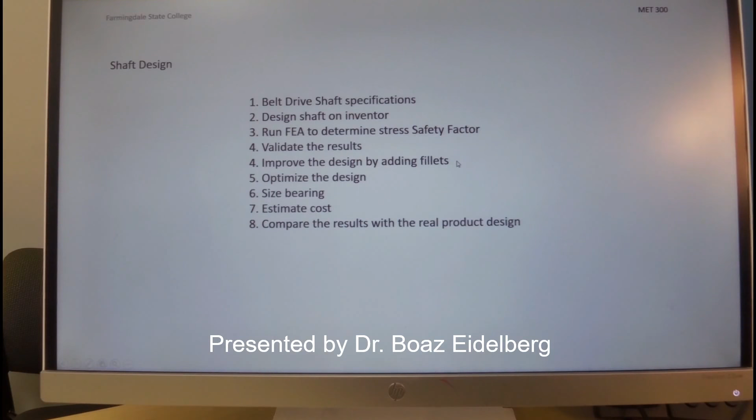Today's presentation will be design and analysis of an actuator shaft. We'll look at the specification of the shaft, we'll design it in Inventor, we'll run finite element analysis with Inventor, we'll validate the result, we'll improve the result by adding fillets and changing the diameters. We'll size the bearings, estimate the cost, and compare the results with actual design.

Linear stages are used extensively in automation. In particular, they are assembled in XYZ configuration, which is called Cartesian robot. They're also used for packaging, assembly, machining, testing, pick and place, and many other applications.

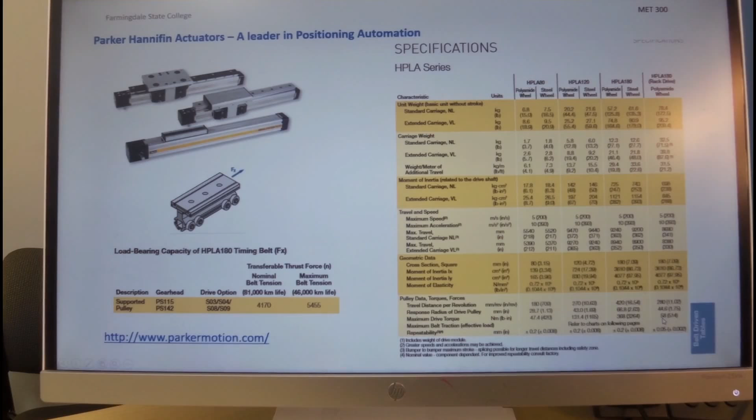For our exercise, we'll use a stage called HPLA. It's manufactured by Parker Hannifin, which is a leader in the positioning automation business. And the reason why we chose it is because it has the highest load thrust force, on the order of half a ton, and it has a moment carrying capacity of 58 Newton meter, which is very high.

experimentation only. And over here we take the design objectives from the HPLA specifications with the maximum load, the maximum torque, and the sizes of the stage. We will choose randomly a safety factor of 3 for our design.

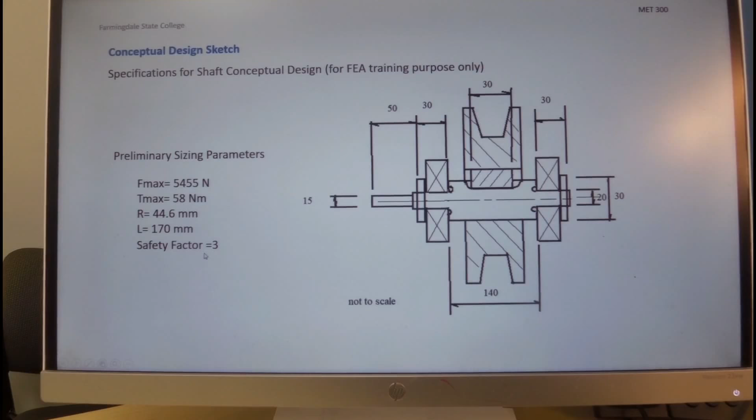We'll continue by making an outline drawing for the shaft with the estimated dimensions, and we select a design objective since we understand that the belt-driven stage has a continuous thrust force, but the bearing and the shaft are rotating. Therefore, we expect the failure mode to be fatigue.

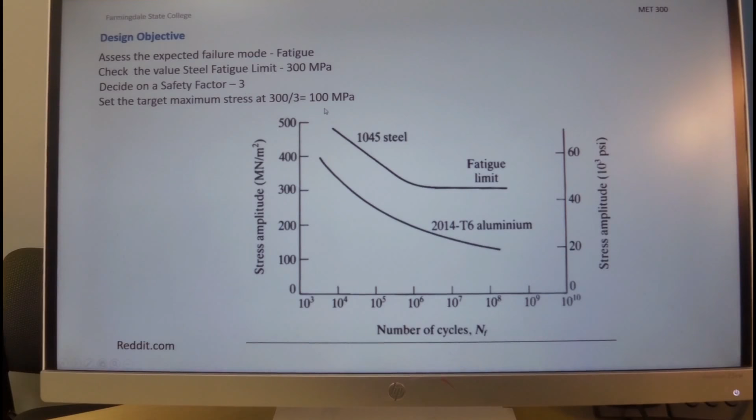We look at the fatigue limit for steel, and we see from the open source literature, as over here by reddit.com, it's at 300 megapascal. We'll have a safety factor of 3, therefore our target maximum stress of the shaft is 100 megapascal.

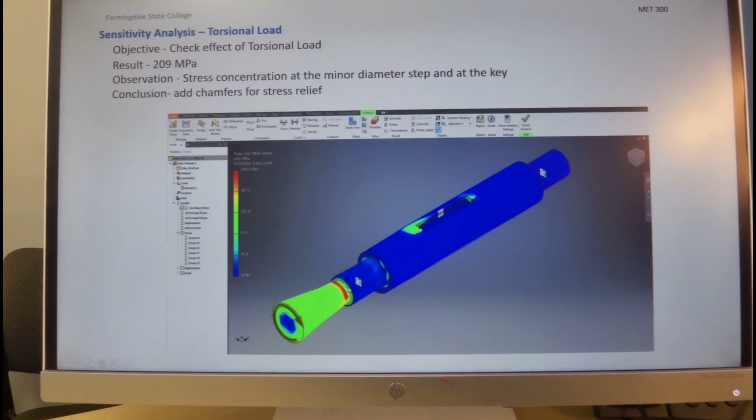We'll start with a sensitivity analysis to the various loads. We have a torsional load, and we apply it. We see that the result is 209 megapascal. We observe that there is stress concentration at the step, and we conclude that we need to apply some chamfer for stress relief.

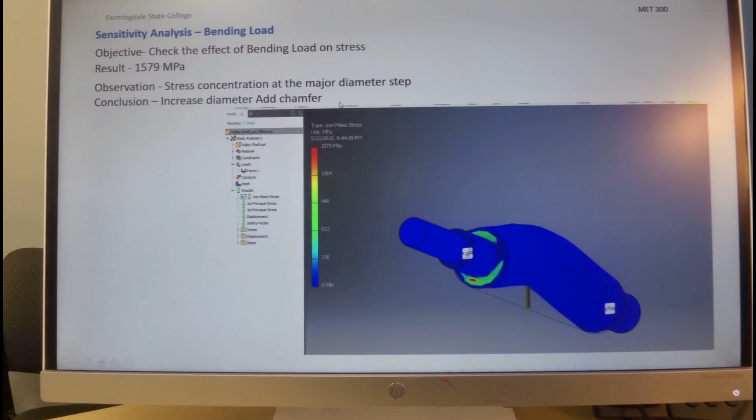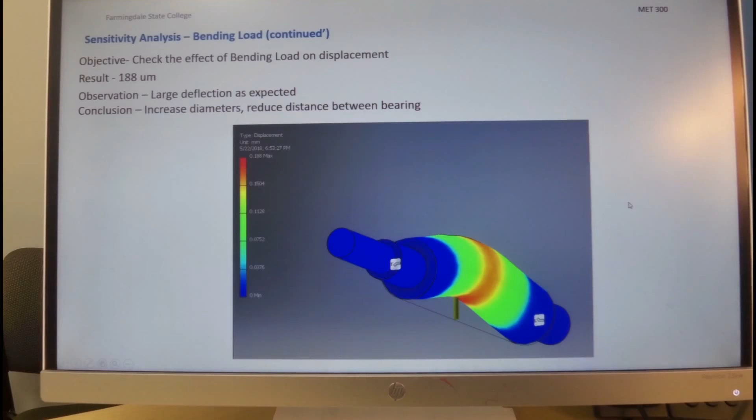We also check the sensitivity to bending load, and we see that the bending load is substantially higher, 1579 megapascal, and we also see stress concentration at the largest step. We conclude that we would also need to add a chamfer over here. We look at the deflection of the bending force, and we see that the result is 188 microns. And we conclude that we would need to also increase the diameter of the shaft in order to substantially reduce the deflection.

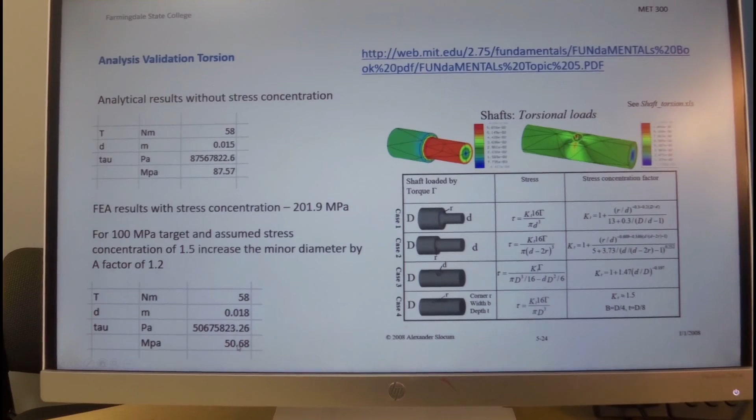With stress concentration, we had 200 megapascal. Therefore, we estimate that if we would like to bring this value to the desired value, if we would increase the diameter to 18 millimeter, we see over here in the Excel spreadsheet that it will reduce to 50 megapascal.

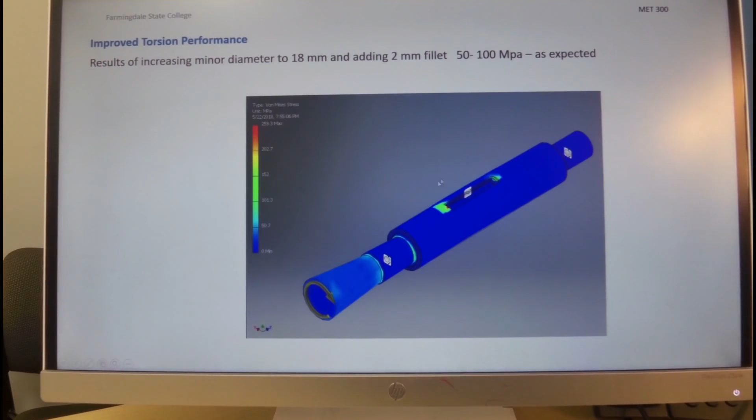We check the results and we increase the diameter over here to 18, and we see that indeed the values over here are mostly blue and light blue, which is within 50 and 100 megapascal as expected. Over here at the key, we still have a stress concentration, but we'll take a look at this later.

We then come to do the bending analysis validation. If we plug into the equation, we see that we should expect 590. However, we receive 3 times a higher value.

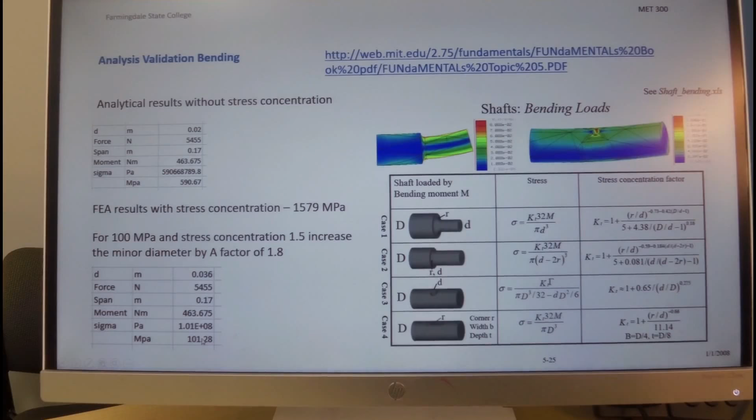And we go through a similar exercise and find out that if we increase the size of the larger side, diameter where the bearing seat is to 36 millimeter, then we'll end up where we would like to be, around 100 megapascal. Then we also look at the validation to axial load, but since we don't have axial load, we need not do this analysis simply because it's not applicable to this case.

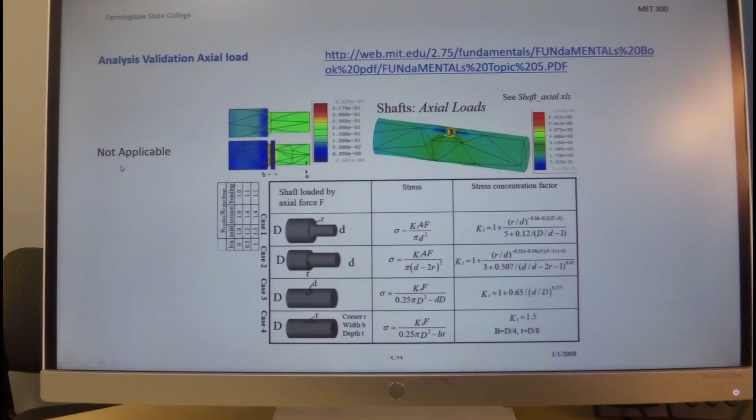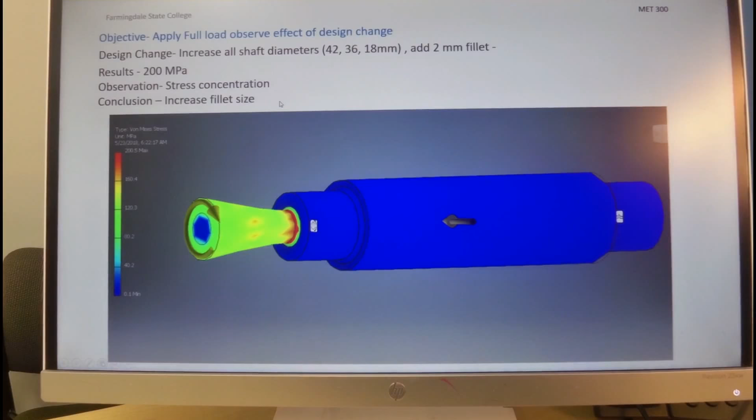The next step is to do some improvement of the design by iteration. So we like to apply the full load and see the effect on the design changes, where design changes is increasing the diameters to 42, 36, 18, adding some fillets, and then we see the result is still twice as much as we want to be. We observe stress concentration at the minor diameter fillet, and then we conclude that we need to increase that size.

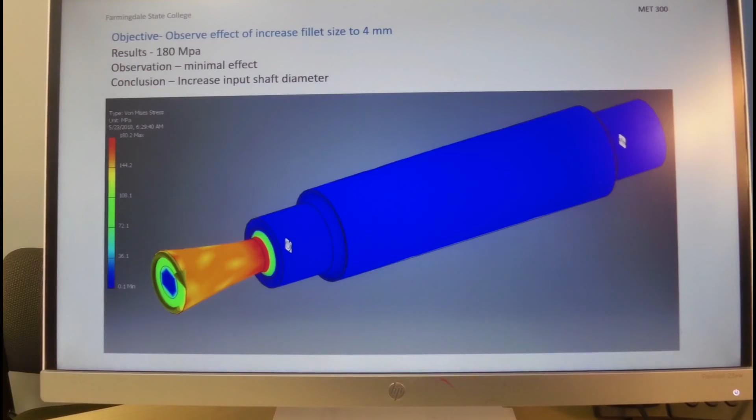We observe the effect of increased fillet size, and we see that the change was not large, only reduced by 20 megapascal. Therefore, we conclude that we need to also start looking at increasing the diameter of the input shaft. Increasing the diameter to 32 millimeters reduces the maximum stress to 60 megapascal, and this is where we like to be. In other words, we meet the objective.

We also like to take a look at the deflection, and we see that the deflection dropped to an order of magnitude of 20 microns. To take a look at the implication of that 20 microns, we consider the stiffness. We know that we push in the shaft at the center with approximately 5,500 newtons, and we deflected 20 microns. Therefore, the stiffness is 272 newton per micron.

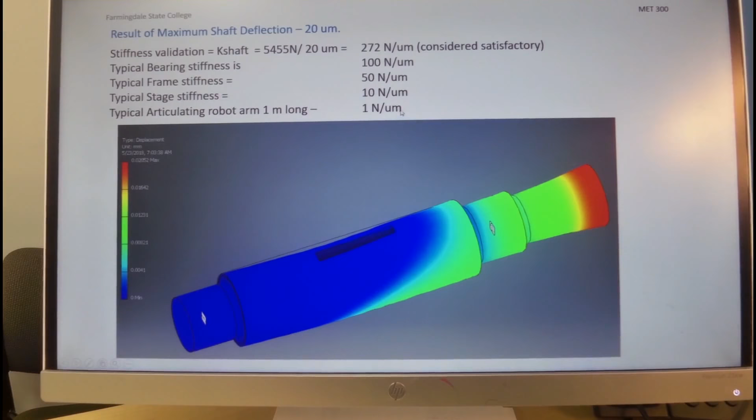This is considered satisfactory. We know as a reference that the typical linear bearing stiffness is 100 newton per micron. Typical frame stiffness is 50 newton per micron. Typical stage, complete stage, is 10 newton per micron. And if we take an articulated robot and extend its arm 1 meter long, then the stiffness is only 1 newton per micron. The number over here is therefore considered to be satisfactory.

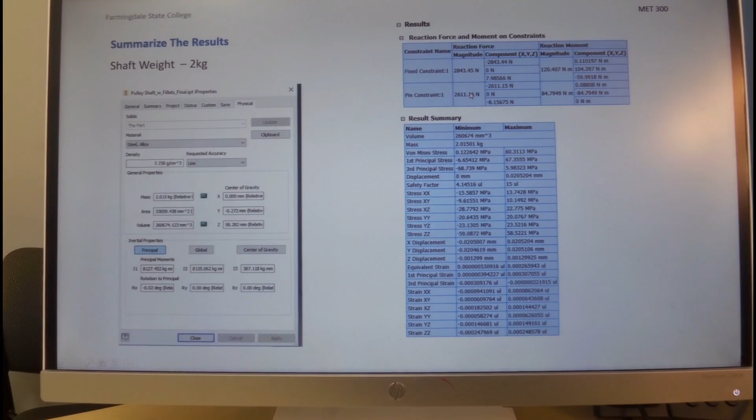We can then summarize the results of the design with the improved parameters. The shaft weight is 2 kilograms, and over here we see a summary of all the results. The von Mises stress is 60 megapascal. The deflection is 20 microns, and we also see here the reaction at the bearing. Now we can use the reaction at the bearing to size the bearing with Inventor.

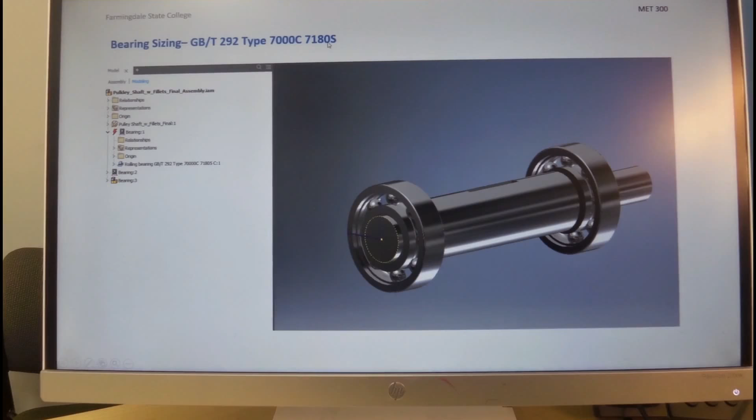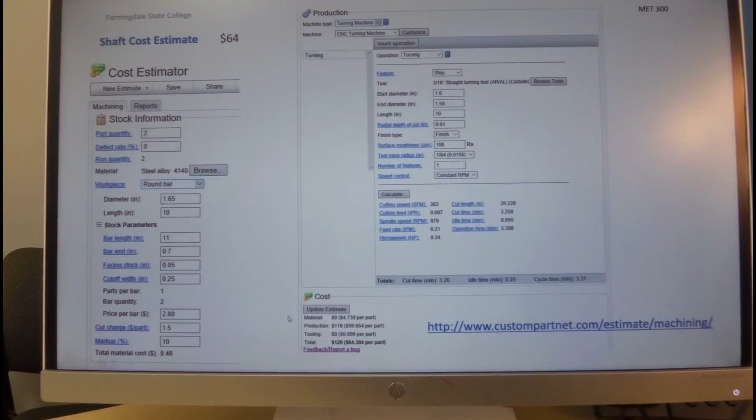And we have an objective of typical 100,000 hours for bearing life in automation. We find a bearing that meets the criteria, and you see that everything looks proportionally reasonable. And we can also estimate the bearing costs by going to the internet and looking at the bearing specification. We find out in this case that it's about $120 per bearing. We can also estimate the shaft cost; material cost using online sizing tools is about $10. And then we have another $55 for machining costs, with a total of $64 per shaft.

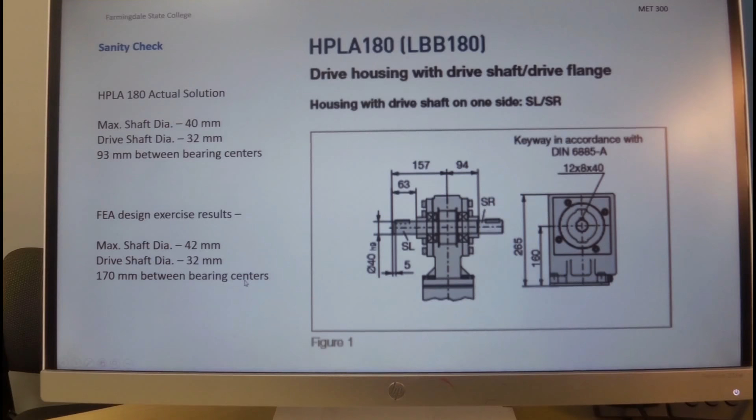Finally, what we like to do is a sanity check and see if the numbers that we came up with in our exercise are anywhere close to what the HPLA is actually using. And from some information available in Parker-Hannifin brochures, we see that the HPLA 180 has a maximum shaft diameter of 40 millimeter. The drive shaft diameter is 32 millimeter, and the distance between the bearing centers is 93. Compared to what we obtained in our analysis, the maximum shaft diameter is 42, the drive shaft diameter is 32, and the distance between the bearing centers is 170.

Using the tools which are readily available by the manufacturers, this is an example of Parker-Hannifin sizing tools. We could go online, click this link, and then it will lead us to a configurator where we can choose all the parameters for the stage and come up with the results that will do the job.

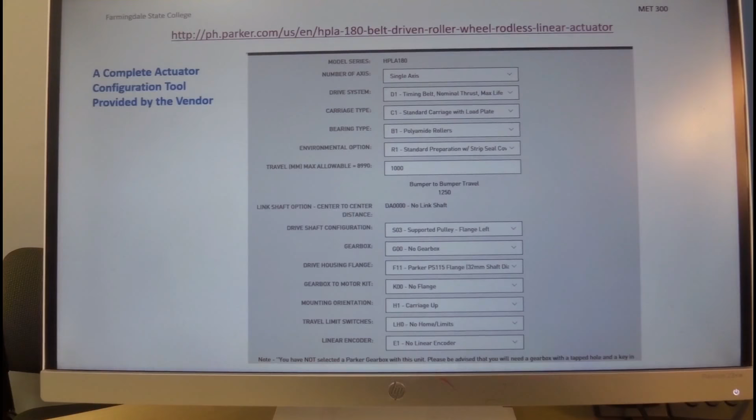This concludes our presentation. What we see is that finite element analysis does not stand on its own. It actually works very closely with the design objectives, and we have to make sure that along the way we continuously go through checkups to make sure that the results that we obtain lead us in the right direction.